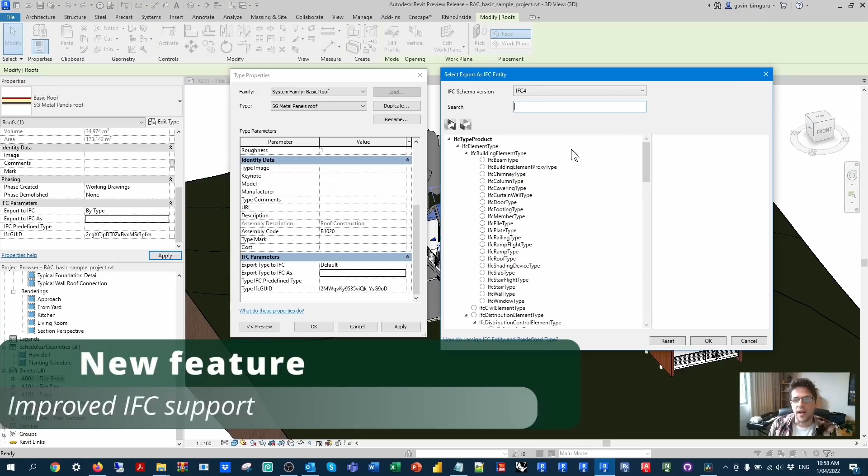Hopefully this video shows architects in particular what is new for them in this version. I won't really be focusing on engineering features, which is probably a good thing because there aren't too many of them to talk about. In this case, I know there are improvements to structural and electrical analytical features. I never use them myself, so I'm not going to focus on them. There are some collaboration features that will benefit everyone, but for the most part, it does seem like mainly there are features for architects in this release.

I will be trying along the way to give you an idea of whether I think this version is actually worth upgrading to, if it's worth getting excited about, and of course, I can't ignore this little beast next to me, the new icons. Gotta say, they are getting ripped apart on Twitter and LinkedIn. They're definitely not the prettiest things in the world, I'll be honest. I probably would just have been happy to have the same logo as before with a number on it,

because that's really the hardest thing about icons in Autodesk software. Non-backwards compatible, but every icon is exactly the same. I mean, that is some terrible UX design, right? Why couldn't they just have put the friggin' number here like I did? Or just go check out Parallax's icons, for example. Anyway, a little nitpick. I wouldn't get excited about the logos. If you see anyone praising Autodesk for them, tell them they're full of it from me.

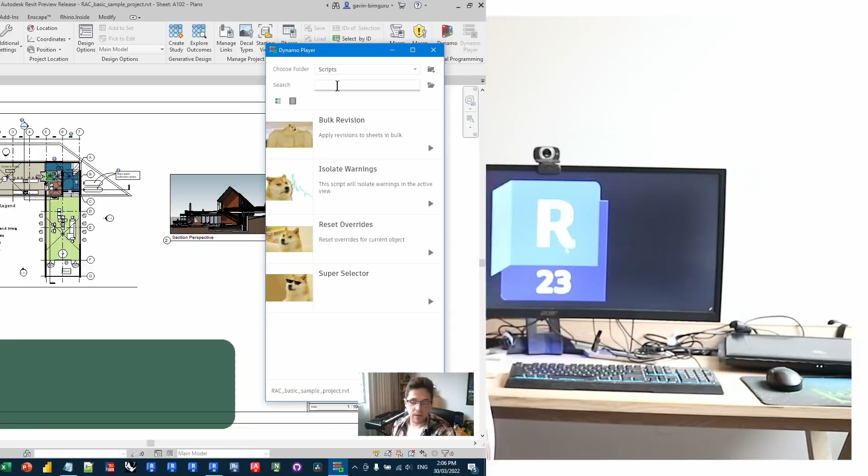But anyway, I'm going to jump in and have a look at some features, and I'll also be looking at Dynamo as well, because there are some pretty big changes to Dynamo. In my opinion, probably more exciting than most of the changes to Revit. So I will show those as well. Anyway, let's jump in. Okay, so let's begin looking at the new features in Revit 2023.

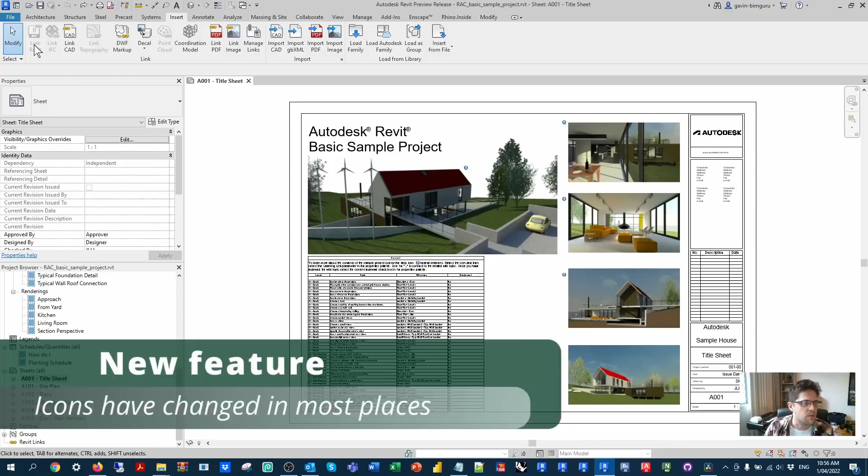Now, the first thing you'll notice is obviously the icon is different for Revit in most places, including the link Revit icon. It is amusing that the link CAD file still doesn't really reference AutoCAD, even though that's mostly the type of CAD we tend to link. But you will notice that you already have this sort of uglified little Revit logo. I'm not a huge fan of the branding. I won't spend too long talking about it.

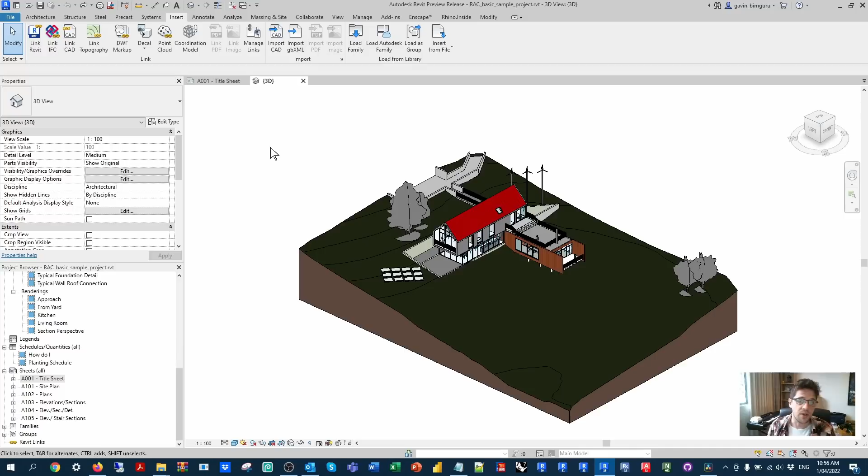I get what they're doing. I get that they're trying to unify their vision, pull an Adobe effectively. But some of the logo choices are a little bit questionable. My favorite has to be Maya, which has an M and an Aya underneath it, so it looks like Aya, which is a bit strange. But then Arnold is, I think, A-I-N, so it's like Aaron, Aaron.

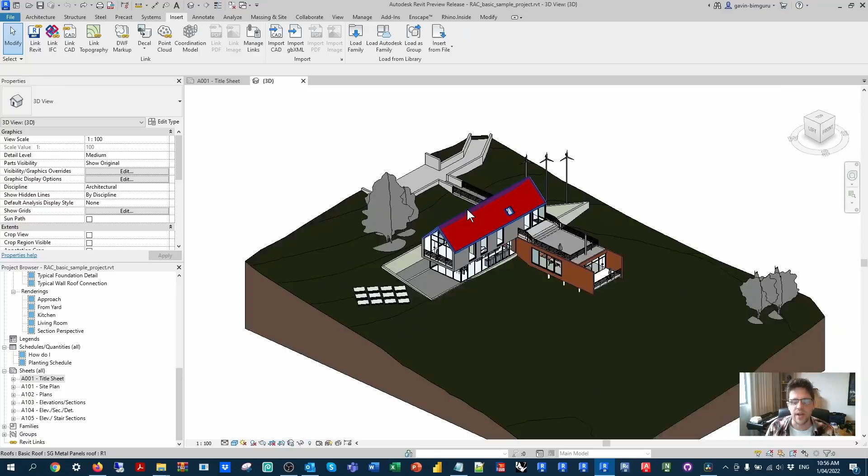So pretty amusing. Anyway, I'll start with my favorite feature in Revit 2023, and that is better support for IFC class and GUID setup. So in this case, if I select an object, down the bottom, you're now going to find by default a few changes to the way that IFC is supported in Revit. One really good thing, first of all, is objects are automatically provided a unique ID for IFC when they're created, not when they're exported. I believe typically before this, it was always generating it during the export process, and this parameter wasn't present in the model before you did this.

Now, these are actually built-in parameters, I believe, as well, so you won't find them in your project parameters. That's going to annoy some people that don't actually like IFC because now they're being given more parameters they don't want to deal with. But in my opinion, it's a step in the right direction. So as well as this, you can tell the object how to export, in this case by type, or yes, it exports, or no, it does not export to IFC. A lot of objects, often we will just be exporting by type. However, we also get the choice to specify what this object actually is at either an instance or a type level.

I'm going to go to the type level of this object. And you'll find the same properties are also going to be under here as well. So you'll find default, which means yes, export the type to IFC, as well as that, what do we want to export it as? You'll notice also we have a unique ID pre-assigned to this as well.

So if I click on these three buttons here, we have a new dialog. So this is effectively an enumerated breakdown of all the IFC classes and their related types in hierarchy, which is pretty great. So if I just collapse the tree, I'll see I'm mostly dealing with IFC type product, element type, or spatial element type and element type, which is great. I can also switch over to the IFC 2x3 schema, but most people are probably moving on to IFC 4 quite soon, if not already.

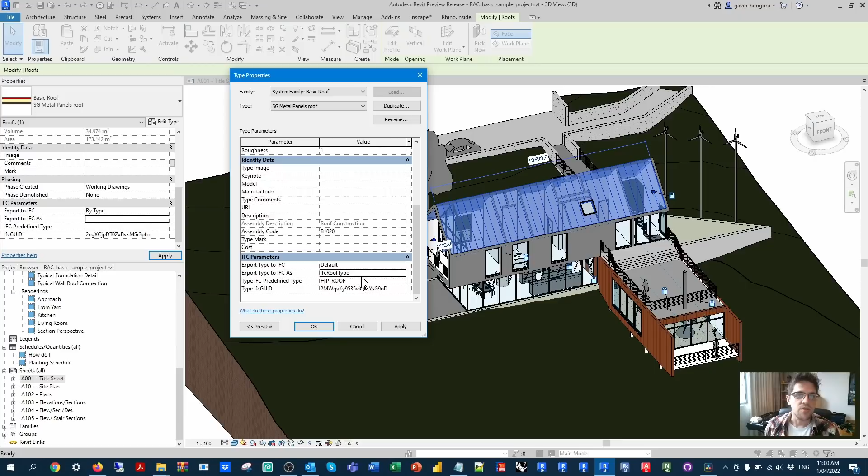If you don't understand anything of what I've said there on IFC, you do need to make yourself more aware of what this is. The industry is shifting to IFC as their common data language. If you don't know anything about IFC, you should take it upon yourself to learn a bit more about it and find out why it's useful for both your company, but more importantly, your clients. Having said that, I'm still learning about it here and there. I'm not a master of it, so the channel may not touch on this too much, but it would be good to give yourself some education on this open data schema and how it can be better supported through the use of Revit. So that's probably my main feature highlight. For some people, they won't even care about that feature. So for me, it's actually my highlight.

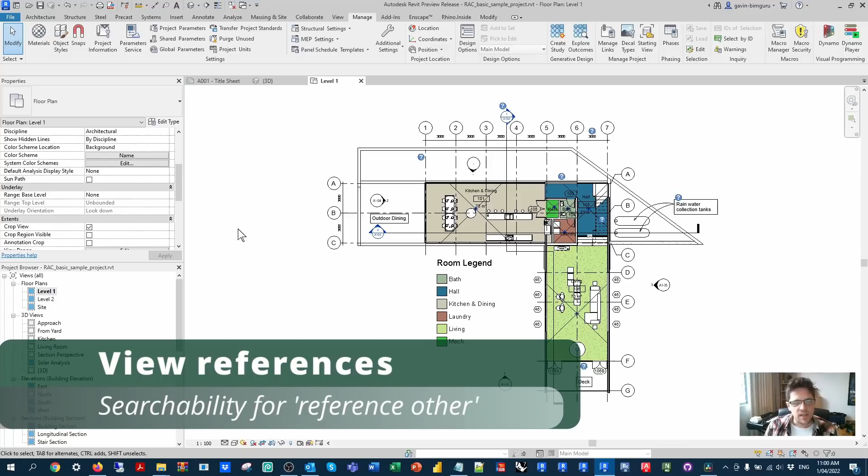After this, the next tool that I found quite useful is if you are referencing another view on a sheet, you now have the ability to search for the view that you'd like to reference. So if I create a view and I create a callout and I reference another view, traditionally we had to just go and find that view, and this list can be huge sometimes. So adding that search tool there is great. So now I can really just focus down on it. A very small UX improvement, but I've wasted a lot of time as a user in the past looking for references to other callouts. And this makes a huge change, especially given that the order isn't always in your sheet order, depending on how you name your views. So quite a nice little feature, a small one, but a nice one nonetheless.

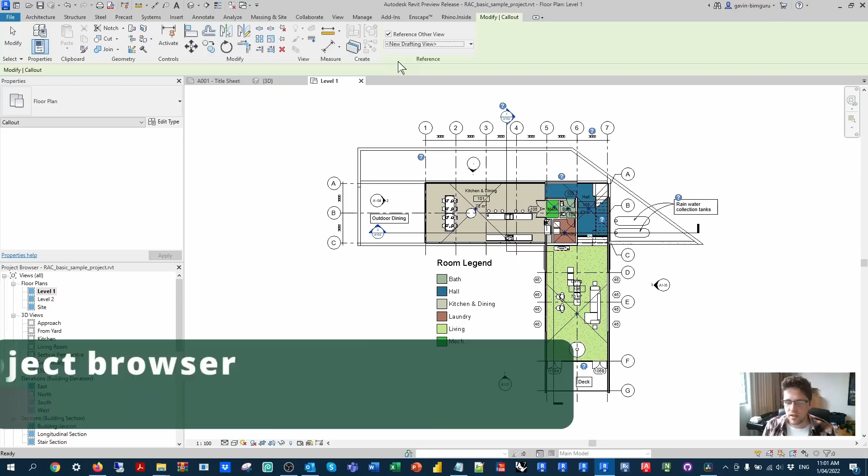As well as this, it's worth noting that in the project browser, we can now see which views are placed on sheets and which ones aren't, which is a really handy visual auditing tool compared to switching the project browser arrangement. Another tool related to views, or more specifically viewports, is we now have the ability to replace views with other views that are able to be placed. So in this case, if I do find a view that isn't placed, for example, approach, a 3D view.

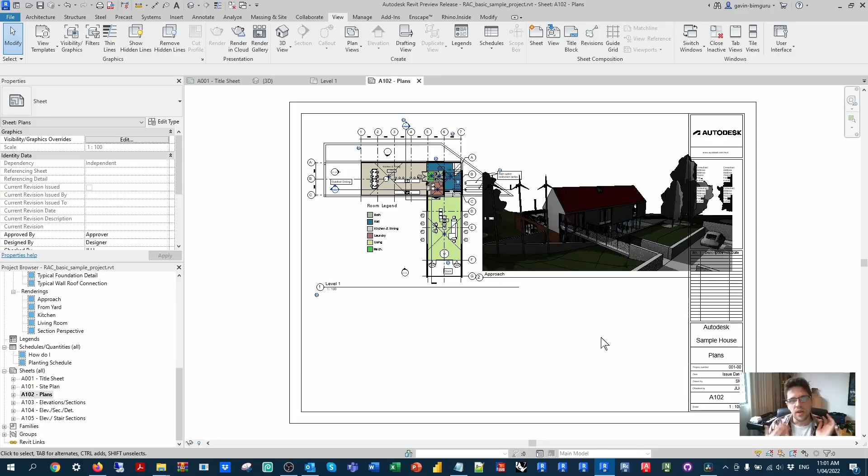If I search for a view, I can nominate a different view and it swaps it on the sheet. So rather than having to delete the viewport and place a new one, it keeps it on the sheet, and it also keeps the view title type as well, which is quite handy. I think it's a nice little feature, probably a small one, but one that will save a lot of people time when setting up documentation sets.

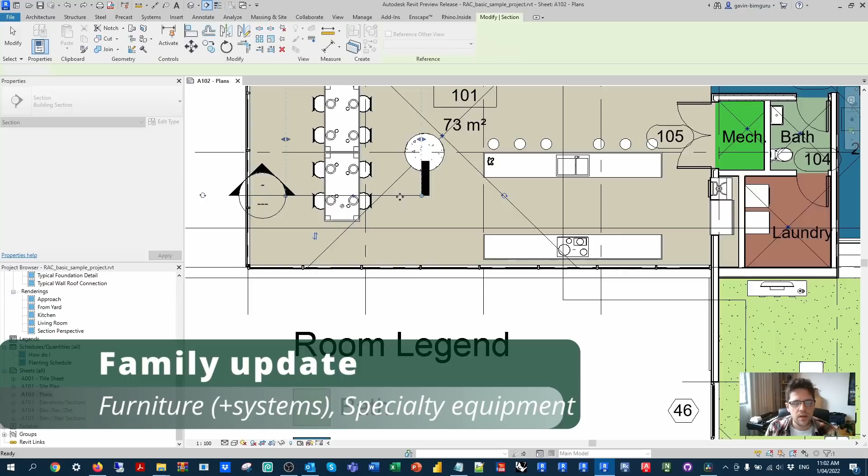Now there's a couple of new family features worth highlighting. If I open a family, say this chair, and cut a section through it, by default furniture in Revit typically projects itself, so no matter where you cut the object, it shows you the left or right representation. But you can actually intervene with this behavior now.

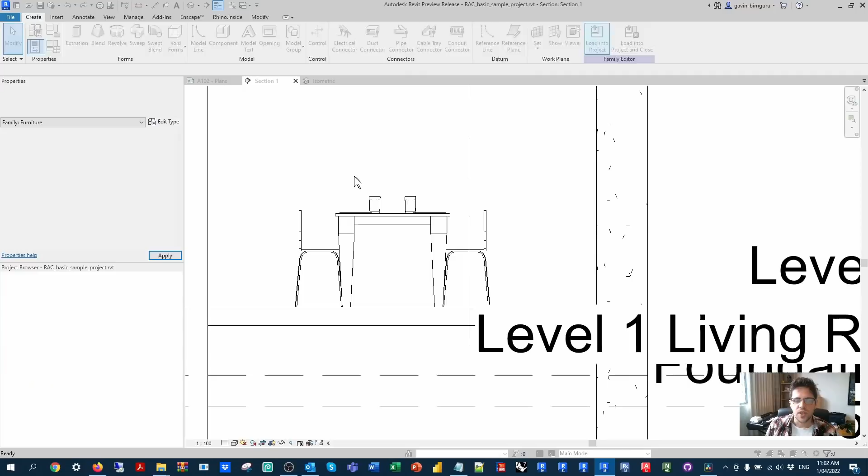If I go to Edit Family, and I'm working with specialty equipment or furniture systems, which typically aren't cuttable family categories, I now have the option to enable cutting in views. If I reload this chair, I should see the cut representation instead. You probably didn't notice the difference, but we're actually cutting through the crossbar of the chair now. In some cases this will be helpful because it used to be a fairly confusing aspect of using these categories of objects.

Sometimes you might want them to cut, but you also want to categorize them as furniture, maybe like a bench seat, for example, in a cafeteria.

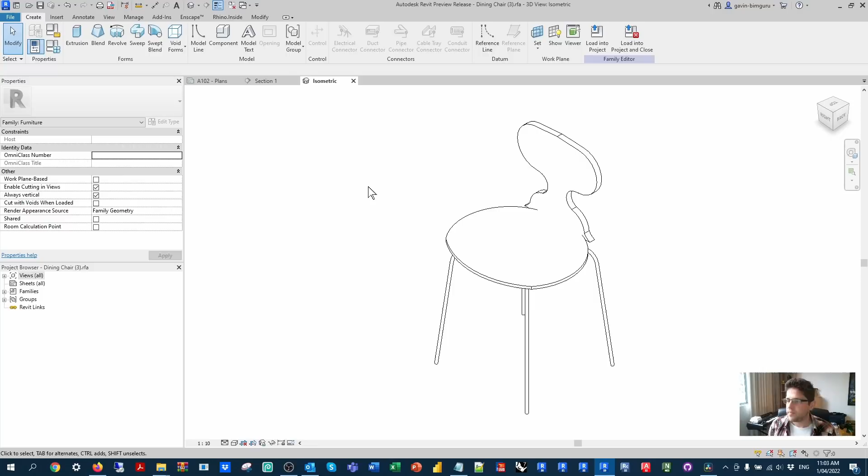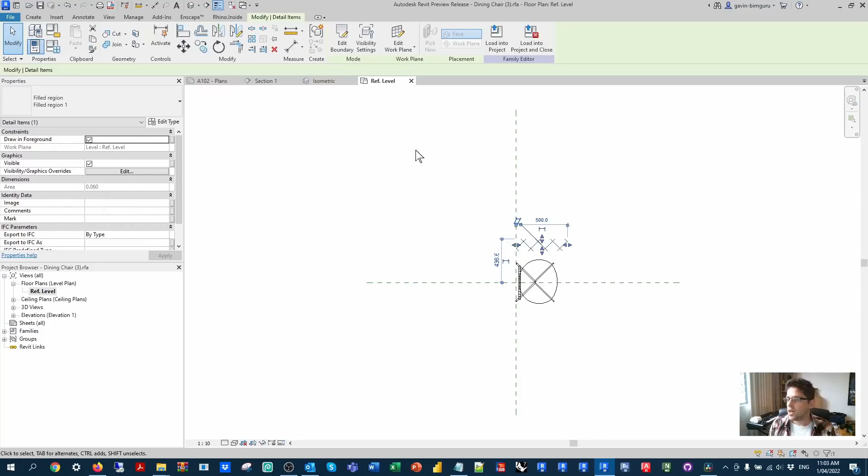Another feature that will be quite welcome is the ability to include filled regions in families. It seems like a silly feature we didn't have before. They have a work plane, so they behave very similarly to other objects. This enables us to avoid having to create a nested detail item or generic annotation to support a filled region in 3D model space. It's actually quite useful and will change the way we build some families to make them more efficient.

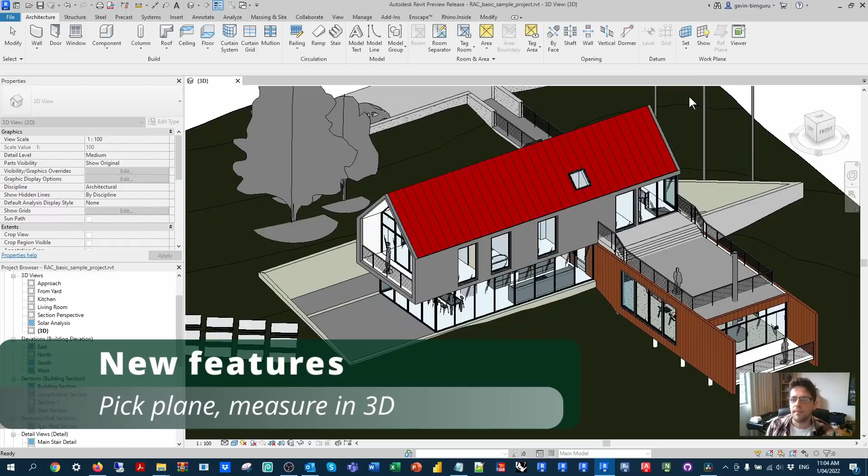There was another feature you might have spotted that I believe is new—I don't recall seeing it in Revit 2022—and it relates to another feature I'll show as well. We can now add dimensions in 3D on work planes, and the first feature is that rather than going set work plane, you can now go straight to pick a plane, which has a shortcut. Typically we used to have to go set work plane, pick a plane, okay, and then pick our plane.

Now I can just go pick a plane, or PK, and dimension to this face. In 3D, without locking, I can just do an aligned dimension. That's quite helpful for people working in 3D who want to quickly check a dimension or clearance. It's definitely a helpful feature that people have been asking for, but I actually get more excited by this next feature—it will save me a few clicks and make life a lot easier.

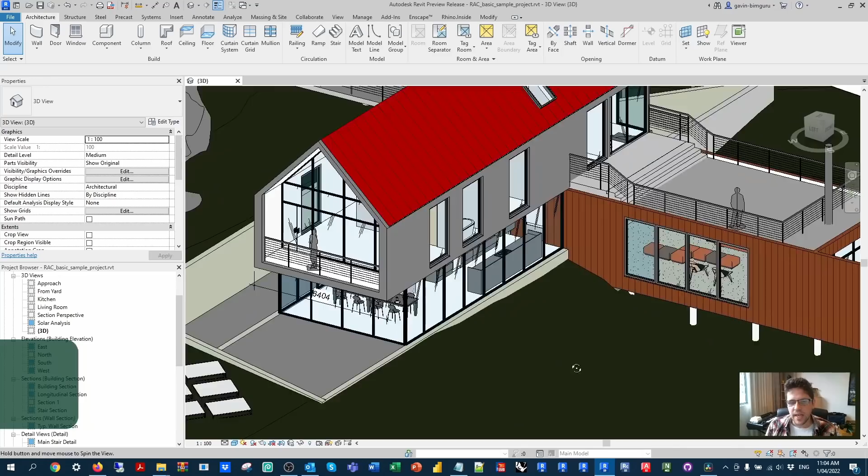Another feature we have now is the ability to tag model groups. This will be quite helpful for people using model groups to do apartment types and who'd like to tag the information of that model group. Some firms might even be able to get away from using rooms doing this, who knows. At the very least, you can do things like tag bathroom type pods, for example.

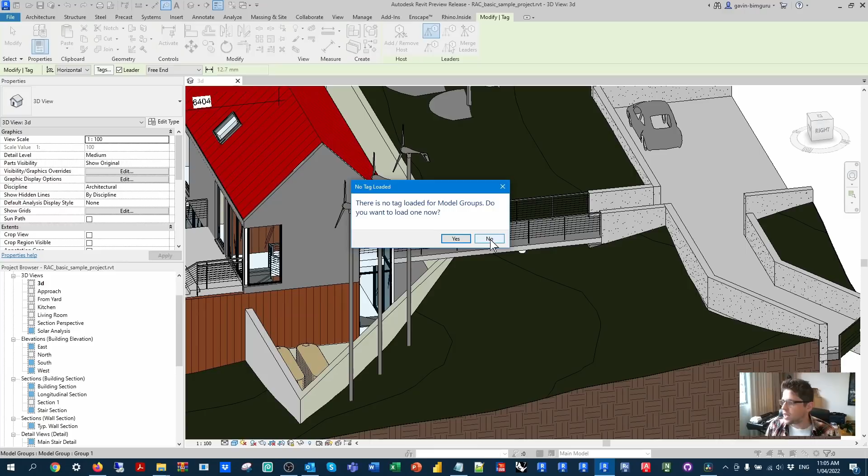You'll notice that if I go to Annotate, Tag by Category, and lock my orientation, I can now actually tag the model group. It will prompt me to load in a tag for model groups, but this is now very much an option that I don't believe we had before, which is quite nice. As people will know, in Revit 2022 they also added the option to add shared parameters to model groups.

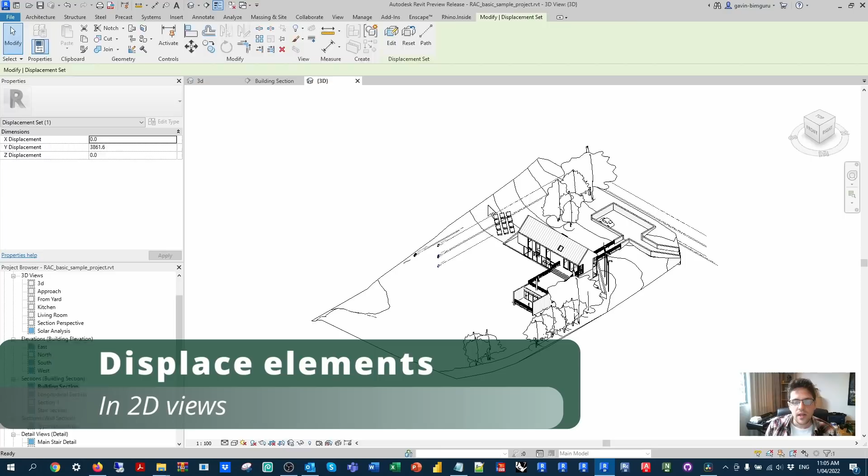Another tool we have that I don't use a great deal, I'll be honest, is the ability to displace objects in 2D views, not just 3D views. Now I should be able to enable the displace elements option when in a 2D view, and as you know, this won't actually impact any object in another view—it only affects it in that specific view.

So that's quite a handy little feature for some people, especially in documentation. I personally probably won't use it a great deal, but there it is anyway.

There's another feature in materials. If we go to manage materials, we now have the option to duplicate a material with new assets. So if I duplicate the material and assets, I'll get a new copy of this Satin appearance asset, and I'll also get a duplicated copy of the shared assets.

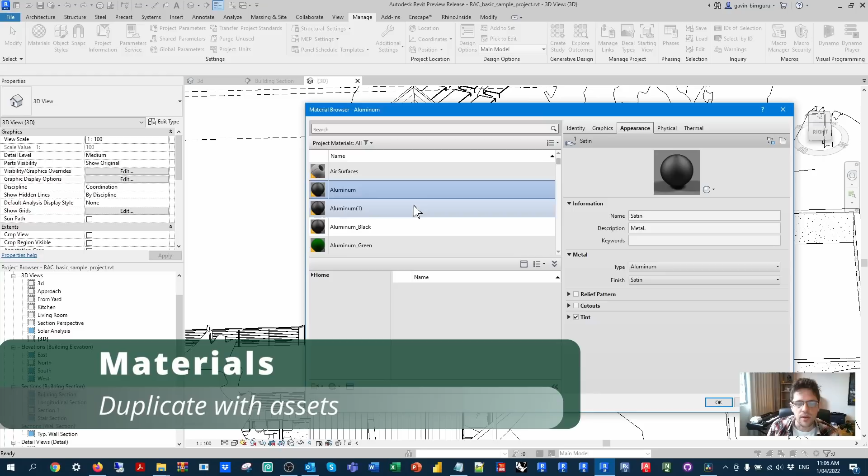Now there is a problem with this. In this case, you can see I've actually duplicated the physical and the thermal property as well. One of the problems is a lot of the time people just don't change these properties—they leave them on the material even though they're not using them. Very quickly, people are going to accidentally create a lot of copies of these assets when really all they care about is the appearance. So I don't know if I like this feature too much.

Sort of like the duplicate sheet option they added in 2022—all I saw was just a whole bunch of mess that was about to come into the model. So I am sort of on the fence about this one. And these aren't going to be purgeable assets either, because they're going to be in use on a material that's in use as well.

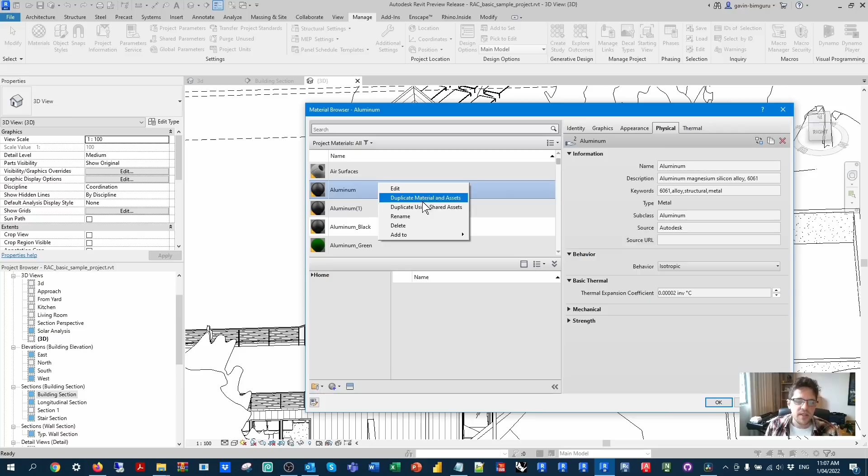I wish it was just duplicate with appearance asset, or duplicate with all assets, or just duplicate with the same assets. Because in this case, you can still do the traditional duplicate without duplicating the assets as well. So I'm sort of on the fence about that one.

Apparently as well, and I don't believe I can demonstrate it here, but I believe you can now also use cloud-based texture paths if you do want to keep your material library up in the cloud.

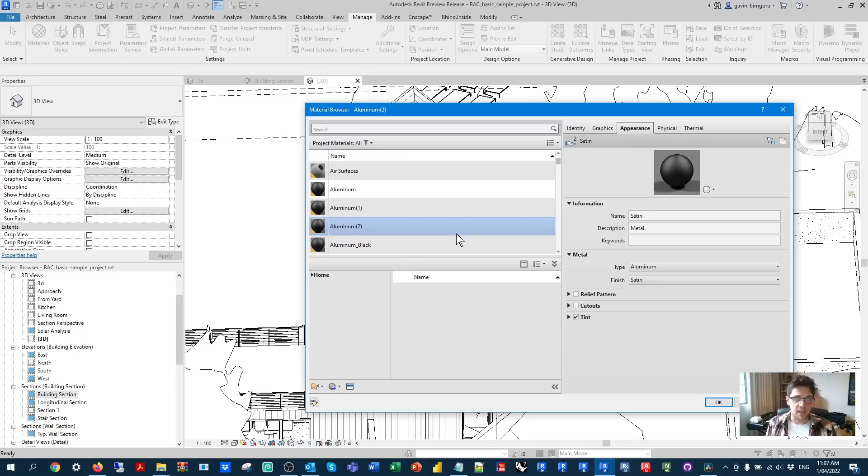As well as this, there is a new feature which I can't really show because I don't have a project to show it in, but there is going to be a cloud-based parameter storage service, to my knowledge, on BIM 360. I'm curious how it's going to work with the API for working with parameters in Dynamo and add-ins. Hopefully it still supports an API method, so we do have the ability to source those parameters when we're doing automation workflows on objects not in the cloud, in the model specifically. But I'm intrigued to see how firms sort of take advantage of that feature as well.

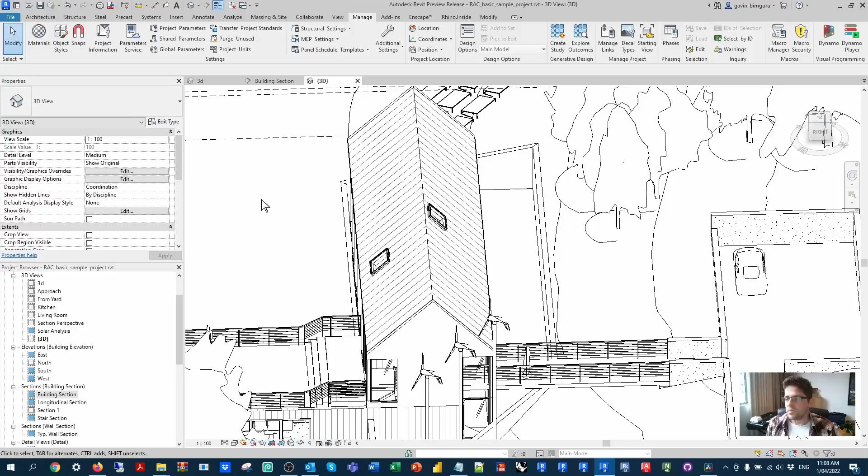There's also some tools coming up called Power Automate, which from what I understand are going to be sort of like scripts or add-ins to some degree that can do things with a lot of data interoperability between files. I'm curious to see what they do with it, but definitely keep an eye on Power Automate—I'm sure there'll be some webinars on it. Personally, I use heaps of Dynamo and add-ins, so I probably won't have a great deal of use for it myself, but it could be a good sort of shortcut for people that don't know much about those features.

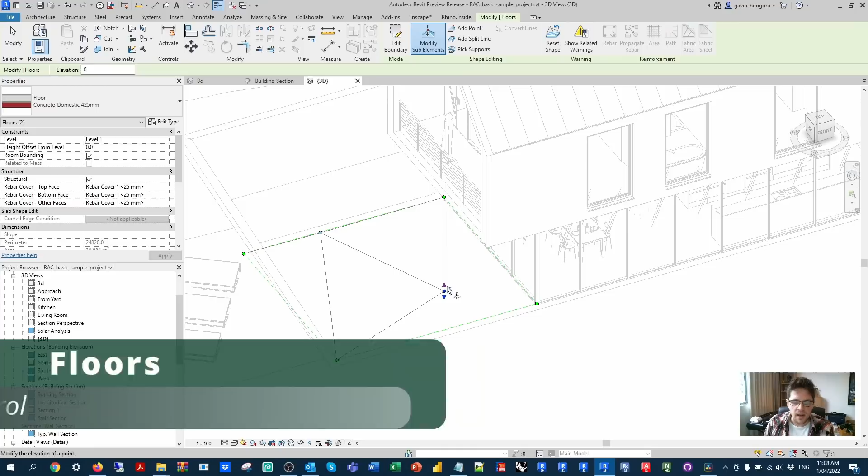The final feature in Revit I'm showing you—not many—is if you do add points to a floor, you will notice that the points are a lot easier to spot now. They're this sort of light blue color. As well as that, I can tell edges to be split lines instead of folding lines. I'm not sure if they have different graphics for them.

Folding edges and split lines, yes, so I could actually hide some lines but not others, which might be helpful when you're trying to show certain paving pieces but not all of them. I'm sure landscapers will enjoy that feature, but I guess a small feature nonetheless.

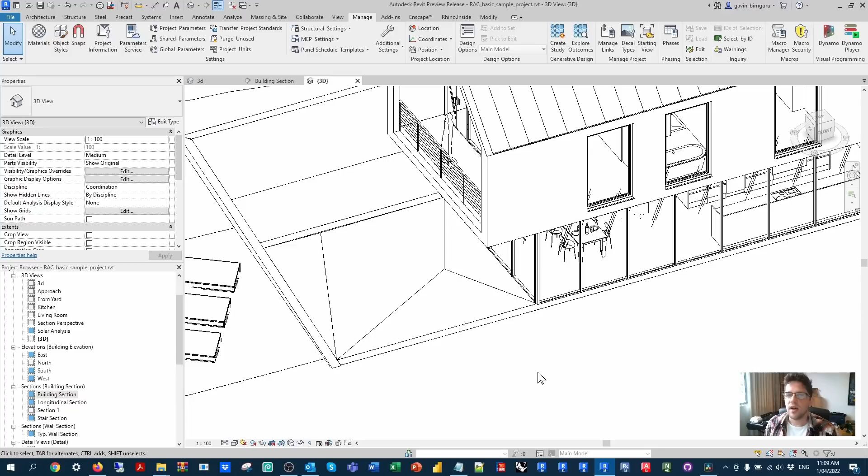But now I guess we've seen some of the Revit features. I'm now going to jump over to Dynamo instead and see what's new there.

So I'm in Dynamo here, and immediately you'll probably notice it looks a little bit different. You can see on the top ribbon, the font has been standardized, and as well as this, everything's just looking a little bit cleaner, a little bit sharper.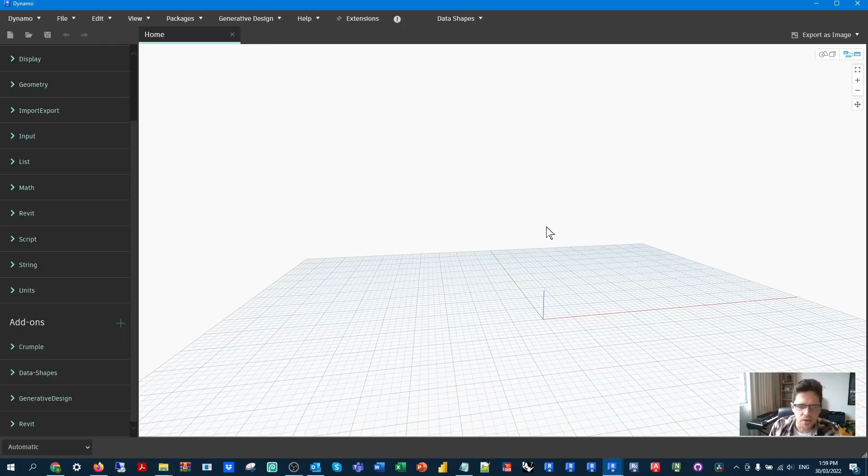Once we actually open a script, we're going to see the difference. I might just make a new script first of all, and you'll notice that the library is a lot cleaner. Whilst you still can support custom packages, you're not typically going to see icons until you get right down to the bottom of a tree.

I think this is probably a good decision because it makes it much more clear which level of a tree you're working at, even though there's a little bit of identity sort of lost at the top level of Dynamo itself.

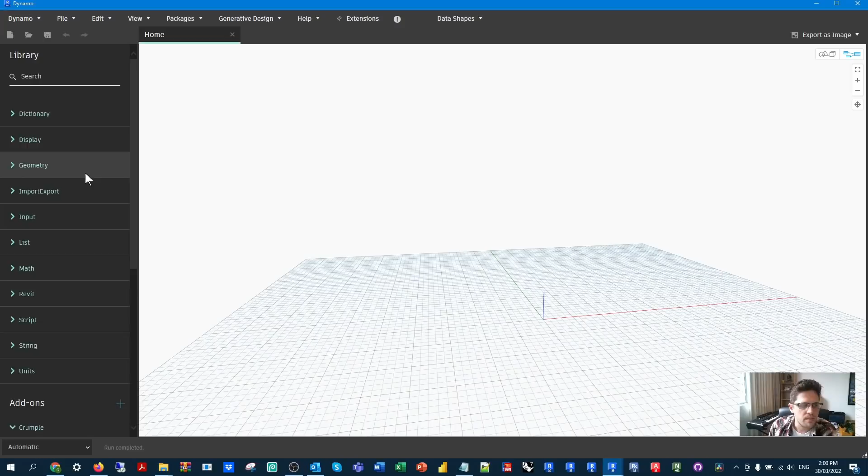You will typically find very similar nodes and breakdowns to what you usually had before. There are going to be a couple of new nodes in here to help people out, but for the most part, all the classic ones that you know and love are still here. We have pretty much all the same areas that we had in the previous version of Dynamo, and they still support integrations and extensions.

We can see the documentation browser, which is quite handy. If I do have a node, I believe the documentation browser sometimes will help, only for errors it looks like in this case, but I guess that's still quite useful. If I go to help here, there we go - you can call on information about nodes, which is quite useful.

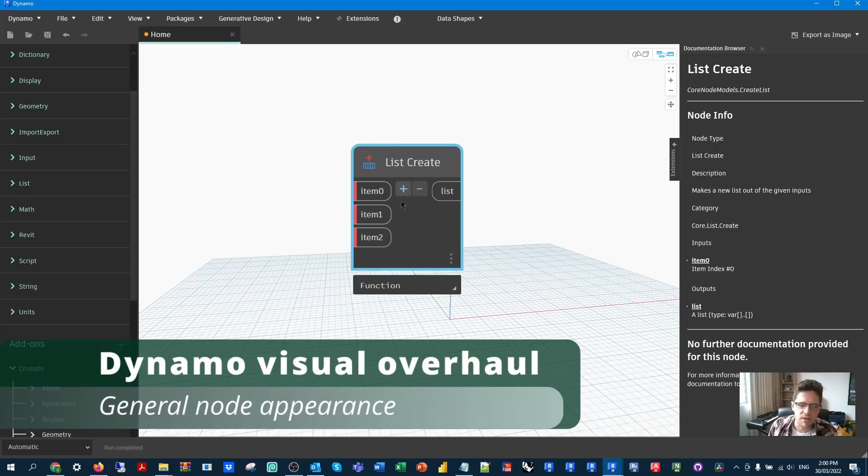You'll also notice straight away everything's looking pretty different. We have a dark mode, as I might call it, that gives Dynamo more of an identity and does create a good level of contrast between all the other objects, between the canvas and the surrounding elements. I do think it looks a lot better.

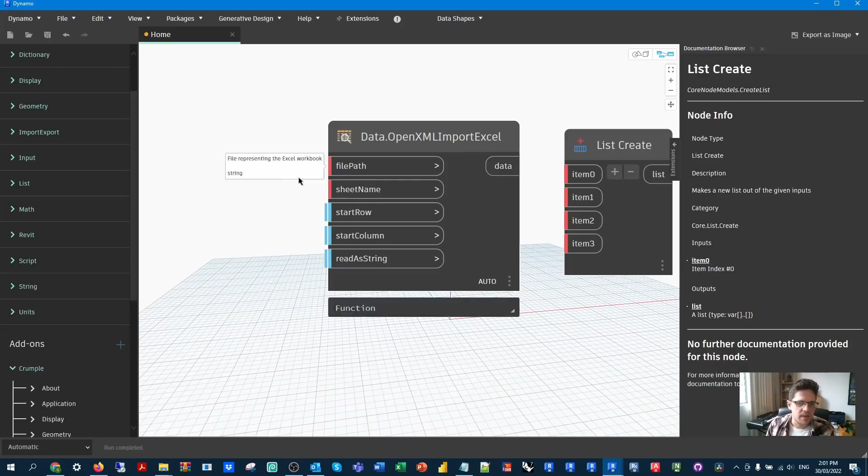There are some changes they've also made to the way some nodes look. I think default inputs by default are blue, and required inputs have this little tab next to them, which I think is quite nice. And there's just various improvements to some of the options you have.

If I group objects, the groups look much better. They now have a title, and you can add a description, which I think is brilliant.

You can also make groups into clusters, which is very interesting. So inside the group, there are actually things still going on, but you just see the outside of that group, which is pretty interesting - I think its size might be based on the node layout. Yeah, so you can't really condense your script, but you can sort of hide the complexity of what's going on behind the scenes, which is quite interesting. Sort of like building a cluster in Grasshopper.

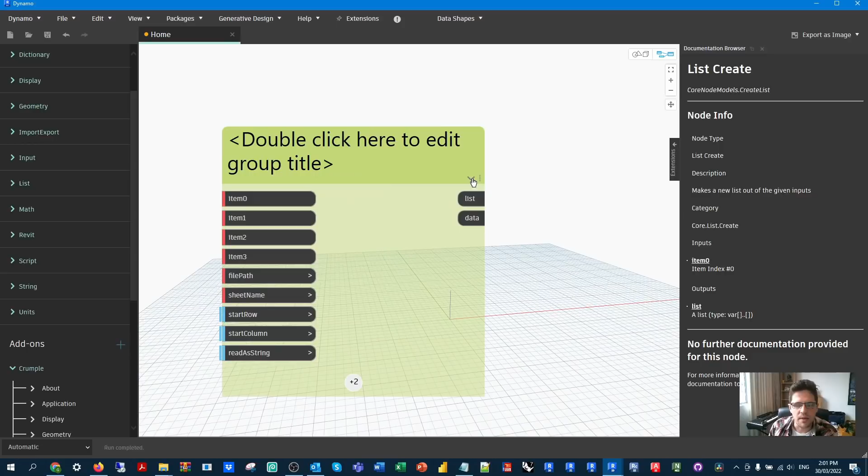I do recommend to the Dynamo team that they maybe consider the ability to condense this group. I'm not sure if we have the ability to condense it - it doesn't look like it, but that might be an interesting feature as well.

So that's some of the basics. Let's have a look at some of the changes that they've made looking at a specific script. I'm just going to open up a script here to bulk revision.

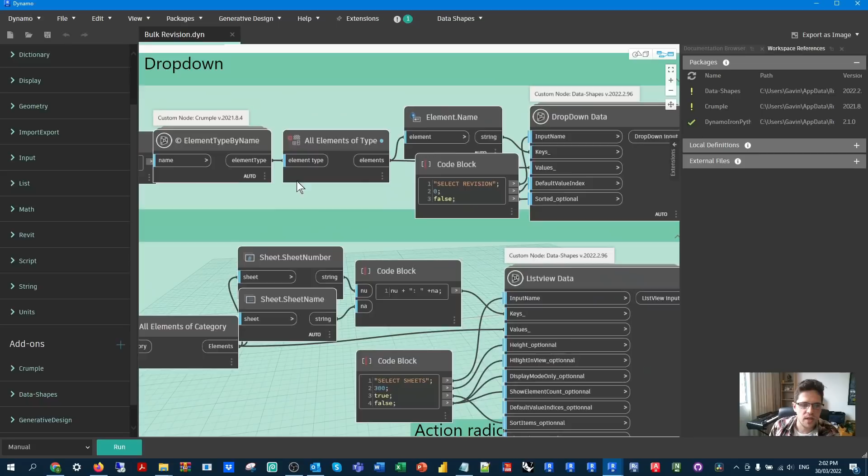Now I have just literally opened an old Dynamo script in this particular version. You'll notice straight away that a lot of the nodes are a lot bigger, so you're immediately going to find you might have to do a little bit of cleanup of your scripts, which is a little bit frustrating, but still at the same time, it is what it is.

You'll notice that you start to see where nodes are sort of coming from, either custom packages, code blocks, various elements of the Revit browser. So I do find that really helps people start to graphically navigate what's going on.

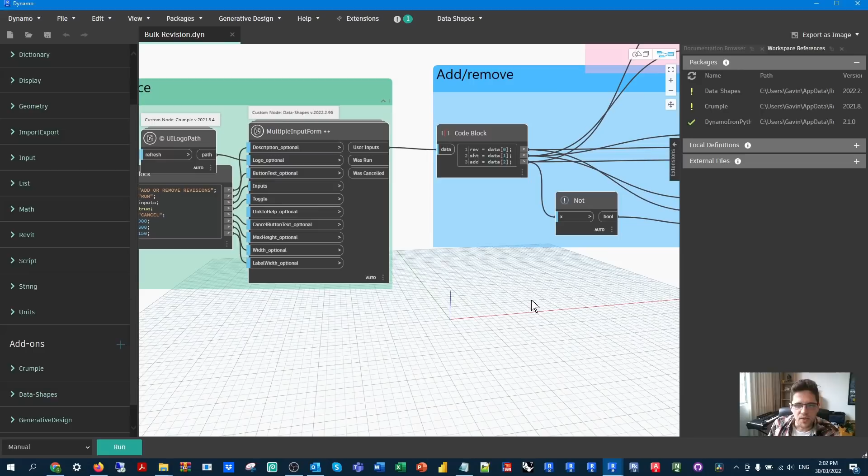Obviously it's great - there are some really good arguments for all the decisions they've made, and I'm quite excited to see what they do with it.

As well as this, we still have support for custom nodes, so they pretty much look the same, except for obviously the real estate issues. I'm using IronPython 2, so this is a really important thing for custom package developers to understand. We obviously have IronPython 2, CPython 3.

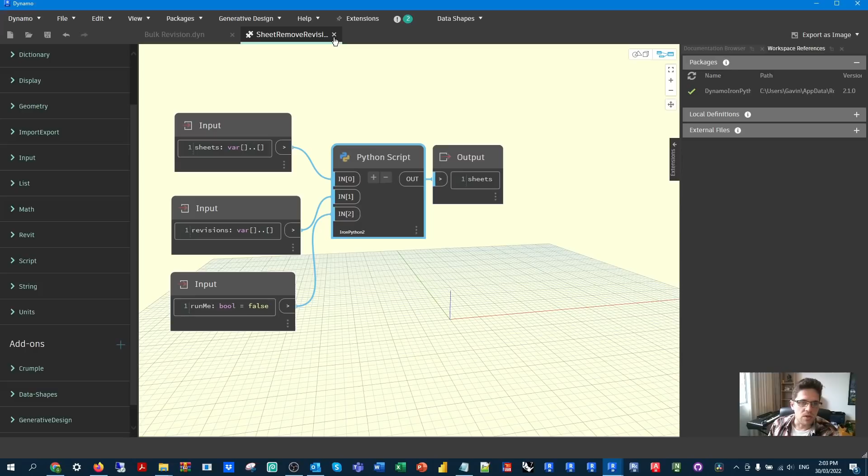However, if you don't have the IronPython package installed with the right version for your package to use, which in my experience is just one typical version, you're not actually going to be able to run any of those old custom packages. I actually see this as a really big problem because a lot of custom package developers are not going to update their package, either because they're no longer working on them, or because they don't have the time, or they don't really see the point in making two separate versions of their package to support a product that should really be multi-version in how it works. So as a result, I actually did have to install this package before any of the custom nodes worked.

Nodes in data shapes or crumple worked. So you will find that is probably a problem.

Now, I would argue if Autodesk is that happy to package the generative design package automatically into Dynamo, why not just put the Dynamo IronPython package in there as well? It doesn't do anyone any harm, in my opinion. There's probably some technical reasons why they don't want to - maybe it uses more memory, I'm not quite sure.

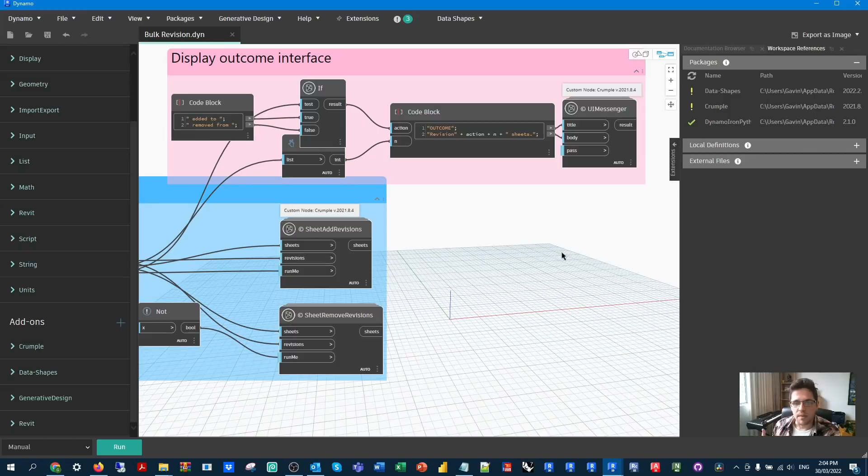But at the same time, it's going to be a huge pain for a while. Currently, the pain that we're dealing with in Dynamo is the Import Excel node not working because of Windows updates, and I see at least one topic every week on the forums about this. This is going to trigger at least a topic every week, in my opinion. Probably way more. Why doesn't my package work? Why doesn't my node work? It's going to happen, and it's going to be a problem once people reach this version.

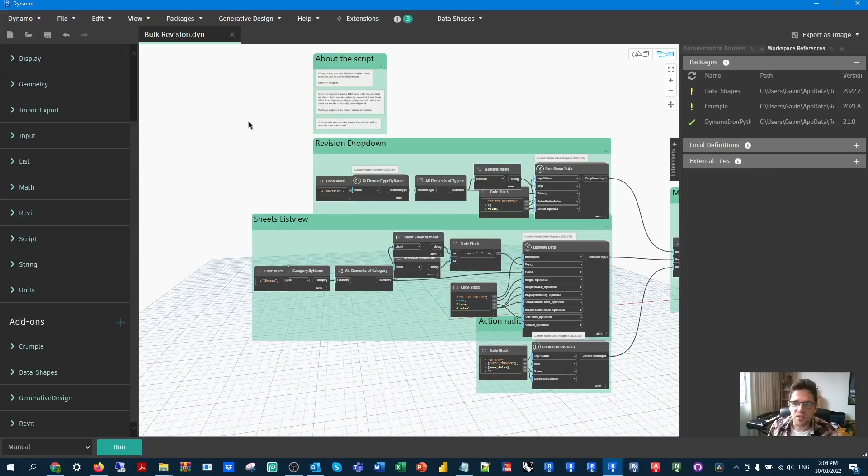So definitely suggesting to the developers of Dynamo to think about any way to do this, minus telling people to get over IronPython. You know, a lot of people used it, and it's still going to be around. I mean, it's good that you gave us this package, yes, but why not just make it part of the default setup? That would be ideal.

Now, one thing actually before I leave this is another really great feature that they've added is a documentation browser and also another browser. So if I go to extensions, graph properties is really great. So you can add descriptions, you can add an icon, obviously a bit of a silly icon here in homage to John Pierson and the Monocle package. But in this case, you can say who made it.

And the best thing is you can add a help URL, which could be like your SharePoint or a wiki that guides them how to run the script. And you can also add custom fields to the description of this script as well, which is actually going to read through in Dynamo Player, which is awesome.

So there's probably a lot of little additions to Dynamo beyond this. I'm probably just going to stop there for Dynamo itself and just show you Dynamo Player. I think already I've spent more time on Dynamo than Revit. Wow. So let's boot up Dynamo Player.

Now I have found one bug with a custom node I use quite often in Dynamo for Dynamo Player, which is interesting. I will show it, but you can see straight away descriptions, script names, and icons really change the way things look. As well as this, you can create simplified versions, so it's a little bit clearer.

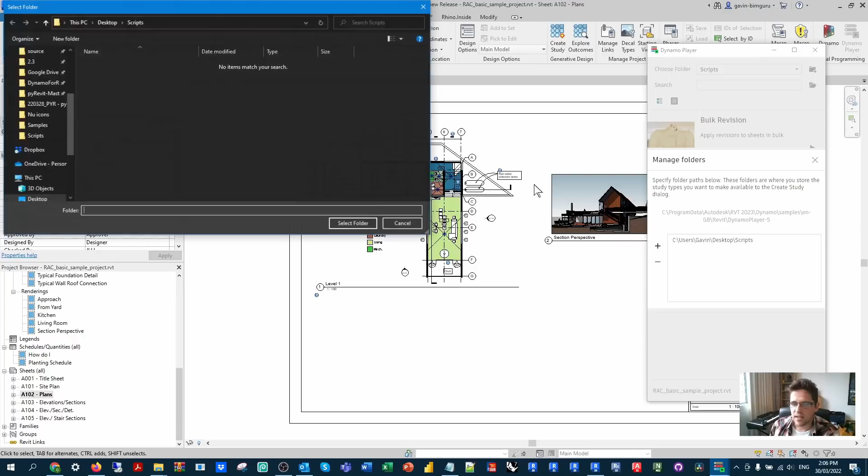Now, one really cool feature is they've added extra folders. I can add multiple locations, in this case on my server, so I can add more places to get scripts from, and I can toggle between those locations. I mean, how good is that? That is definitely a feature that a lot of people are going to like.

So if I go to, say, maybe I'll go to just a set of scripts that I have somewhere. I just want to add one extra folder. And this is an awesome feature. Like, I really do have to commend people. Let's just add my Nonica scripts. So I'll add these two, close this, and now I have two places to draw on scripts from. So I can pick between different sets of tools from different folders, which is a game changer.

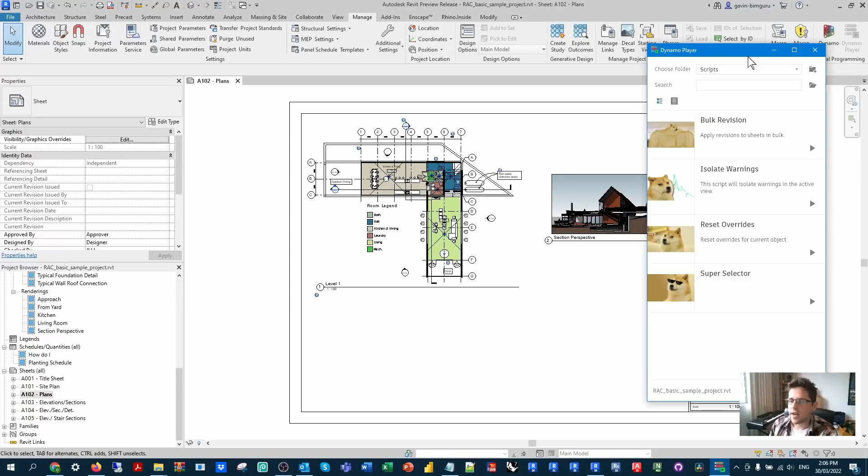It would be great to see this worked back into older versions of Dynamo because it's much needed, and it makes this a much more fun experience for the user. Now I can still run my scripts. I can also hover over a script to see information about it, such as a help. So now it opens that URL that I provided it with. So that's really awesome for companies that do use wikis. I think that's going to be great.

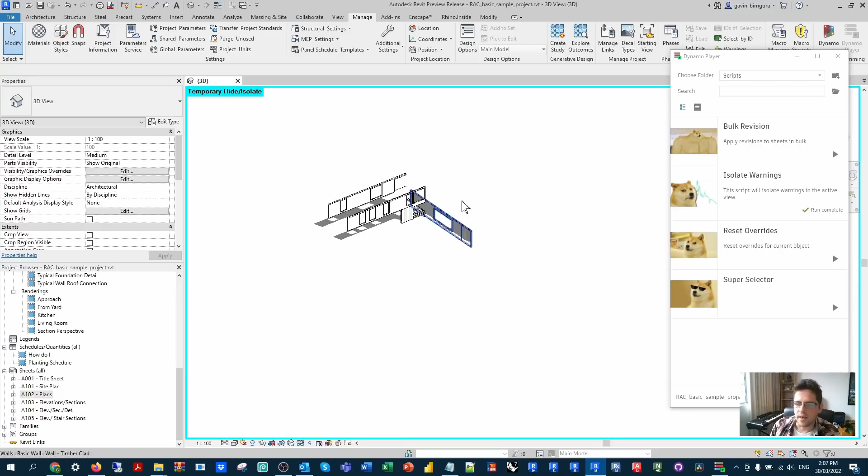So let's just run one warning first. I'll just run the isolate warning script. So I have to press play. It's going to run the script like normal. In this case, it's eventually going to give me a dialog saying, you know, there are 7 elements. Do I want to isolate them? Yes, I do. And there they are. And I can see that my run is now complete and it worked. So it's a much more friendly experience.

Now I did find this script actually does cause a bug with Dynamo Player, so I am going to show it. The end of this script is going to be a UI generated through a pop-up message. So it seems like if I end on one of these, it usually bugs out Dynamo Player. So it seems like that node somehow disables all the scripts in Dynamo Player. So hopefully that helps the developers seeing that.

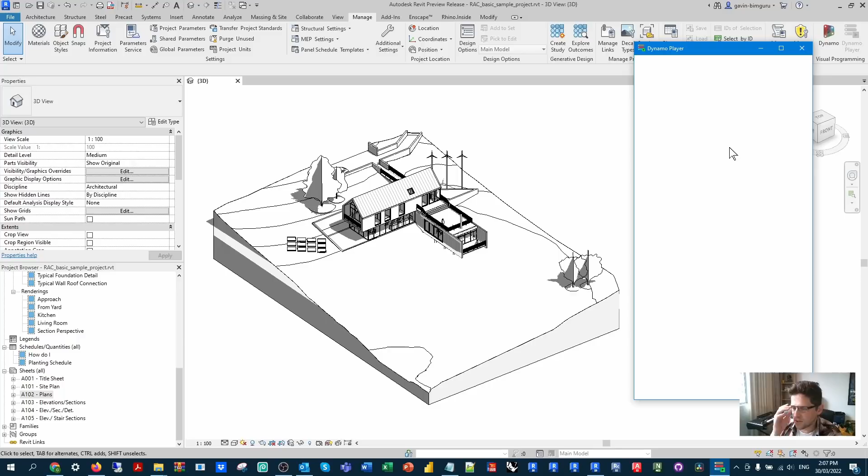But in this case, I've got to say Dynamo Player for the most part, really good work. Dynamo, interesting update. It will be great to see it rolled back into Dynamo in older versions, at least in 2022, because a lot of people are still using that version.

But at the same time, I get that you guys only have so many hours in the day to do things. Must say, Dynamo for me was a much bigger highlight than Revit in this case, but hopefully the IFC features are an indication of things to come. So that's actually all the features I have to show you. Probably record time compared to my old videos, but there we go.

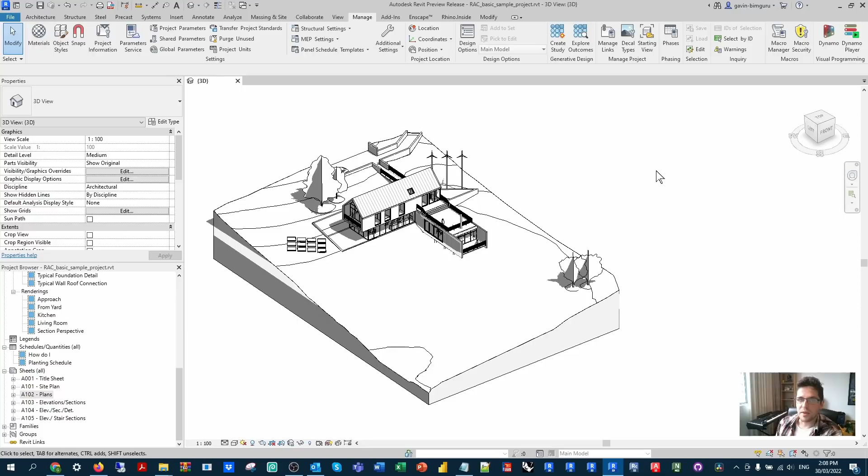So there we go, another year, another Revit. Must say, overall, a little bit disappointed in this release. I'm definitely probably not going to be working in Revit 2023 very much. There's not many features that will bring me up to this version. A lot of us are still working in old builds, and it does always lend the question, is the version per year really a manageable strategy for anyone but the shareholders of Autodesk who get all excited when there's a new sexy version with a new sort of ugly logo?

So I'm a bit on the fence with this one. I definitely still use Revit a lot for my day-to-day work, but that doesn't mean that I don't have the ability to criticize it quite openly and arguably fairly as well. I do think that the beast is slowing down a lot in terms of what's changing and what's improving, but it is good to see them at least starting to make forays into making the IFC enabling experience a lot easier for users that almost have no idea how the system works.

Building in some of those enumerated options in there is probably a step in the right direction because most people just won't have the time to learn the full IFC schema. It'd be good to see them enable other ways to manage property sets in an enumerated fashion where possible.

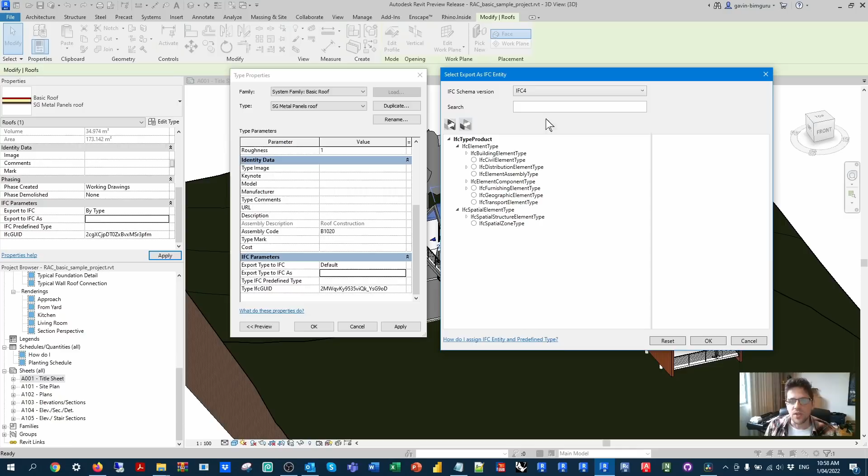But I guess moving on, I am excited to see the Dynamo changes, but I am disappointed to see that we're probably not going to get them in older builds. Also, the deprecation of IronPython 2, in my opinion, is going to be a pretty big problem. I feel like we're going to see a lot of questions on the forums about it, and for the most part, users are going to really struggle to understand how to make that work.

How about we just don't include generative design and we just include IronPython? In my opinion, people get much more excited by the second one than the first one. Sorry to the team at generative design. But anyway, I guess there isn't quite that many features in here to get me excited. I know there's some coming up that I can't talk about that would have been good to show, but I guess they're not ready for 2023. So maybe there'll be a patch, I don't know, maybe there'll be a Revit 2024. Let's hope they come a bit before that.

There are a few cloud features that I'm sure will change some things about how we work on BIM 360. So it'll be good to see how people take advantage of things like cloud-based parameters. But yeah, gotta say, it feels a little bit underwhelming this time around.